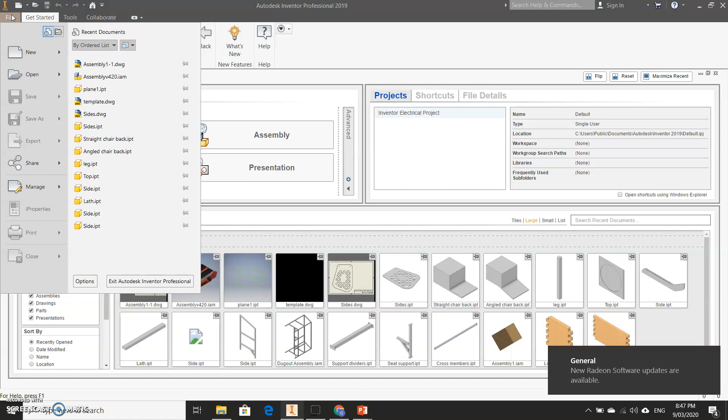So the first thing we need to do is open up Autodesk Inventor Professional 2019. You should find the icon for that on your desktop. The next thing you need to do is go to File and click on New. Just click on New and you should get a dialog box open.

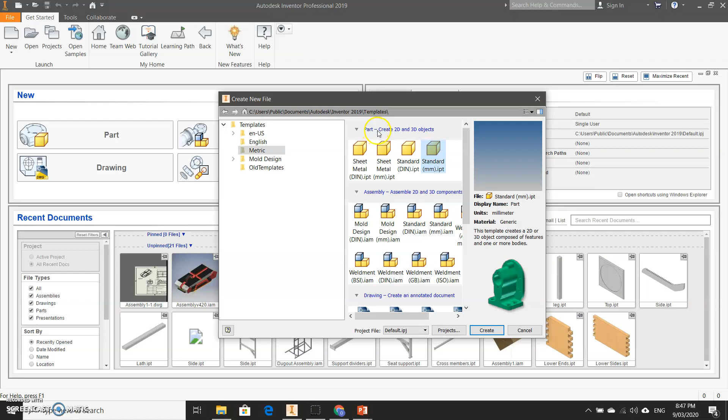Then you click on Metric. Once you've clicked on Metric, the first thing you need to do is create a part. So we're going to go standard mm.ipt. We want to click on that, so it's millimeters that we're using. The .ipt is basically just to indicate that it's a part we're drawing. Okay, create, and it may take a second or two for this to open, but that's fine.

So the graphics on this type of software is really intense on your computer and on the graphics card, so you have to bear with it at times, okay, particularly when you're rendering your drawings at the very end.

So now the first thing I might do here then is go to File, and I'll show you how to save your work. So you're going to go File, Save As, and you want to save this into a particular area. So you will look down through your folders and you should be able to see your name, your first initial and your surname. So you click on there and create a folder in here somewhere.

In my case, I am going to save it into this new folder here. So I'm going to right click on that, rename it Raspberry Pi. Okay, so I'm going to double click in there and call this one the PCB. PCB stands for printed circuit board. So I'll click on Save, and that's our file directory set up, pcb.ipt.

And the first thing now, we're getting ready to draw. So we'll click on Sketch. We will click on the down arrow underneath the rectangle tool, and we'll click on a 2-point center rectangle.

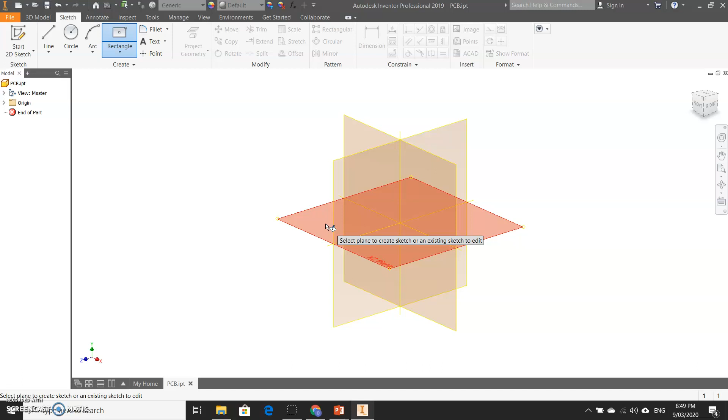I will draw on this top plane. Now these are 3 different planes. It doesn't matter which plane really you draw on. You select which plane depending on what view you're looking at your product. So in this case, we're going to be looking down at the top of the circuit board, so I'm drawing on that plane.

I'm going to move my mouse over the middle. You'll notice that a green ball appears and you've got X and Y coordinates here. Now realistically, you don't really need to worry about those. The main thing you should be concerned with is that it's at X equals 0 and Y equals 0.

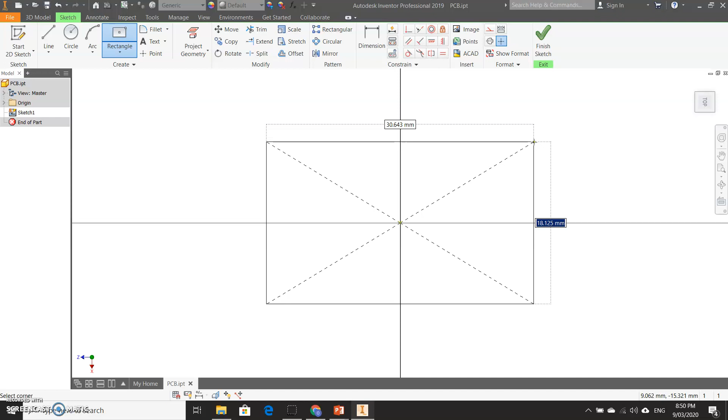So we click, you move your mouse out, and the dimensions of the Raspberry Pi that I can see online - you'll need to double check these, because if you don't double check it and the laser cutter cuts it out and it's wrong, it's a waste of material and a waste of money.

Okay, so on the side here where it says 18.125 on my screen, I'm going to type in 56 on my keyboard, so 56. I'm going to press the tab button, which is found above the caps lock key, and I'm going to type in 85 and press enter.

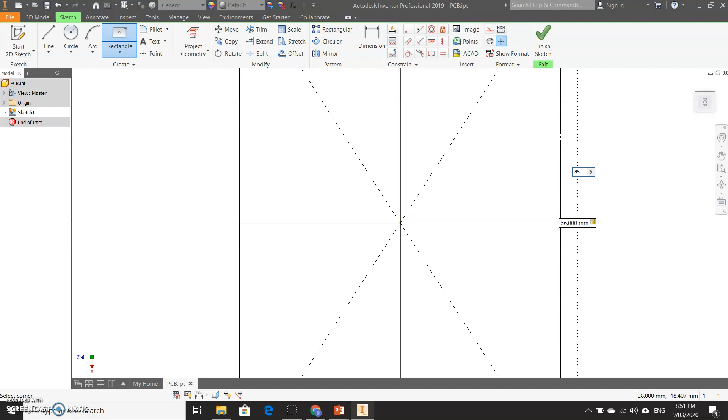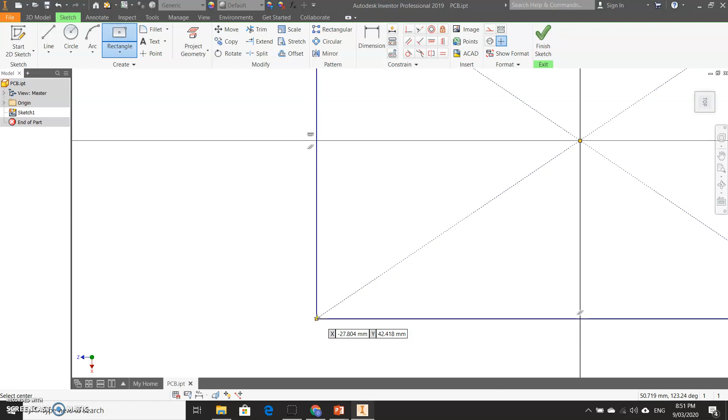Okay, I'm going to zoom out, and if you use your wheel on your mouse, you'll be able to zoom in and out, and we can zoom into specific areas. Like if I wanted to zoom right into this corner down here, I can use my mouse wheel and just move my cursor into the corner that I want to zoom into. Same thing goes for this one over here - you just move your mouse wherever you want to zoom in at.

It's very simple. Over on the right hand side, you've got a hand tool, which you can use to move things around your screen like this, just by clicking and dragging. You can click on this view orientation up here to move things around, look at it in 3D, from the side and from the bottom, or you can rotate it around. So there's a couple of quick tools for you.

Okay, the next thing that we need to do now is locate where the holes are going to be. Now on the drawing that I've got in front of me, it states that there should be a circle in this corner here somewhere.

Okay, I'm just going to draw a random circle to show you. You can type in the measurement if you like, or you can just click, and you've got a circle in there.

If you've already clicked by accident, you can give it a dimension by clicking on the dimension tool up here, clicking on any of your lines, and it'll automatically bring up this box which allows you to type in whatever dimension you need. In this case, the internal diameter is going to be 2.75 - press enter.

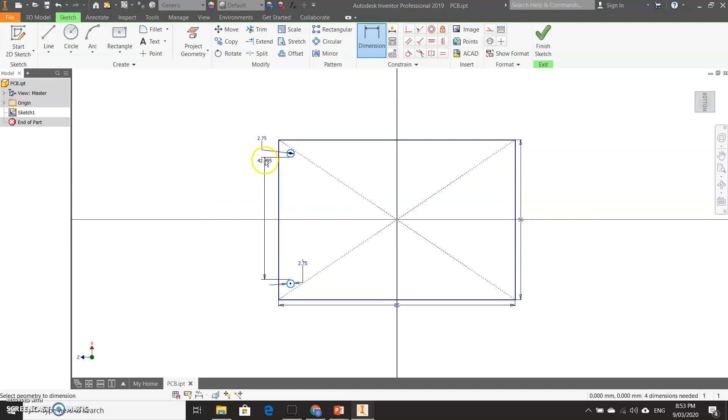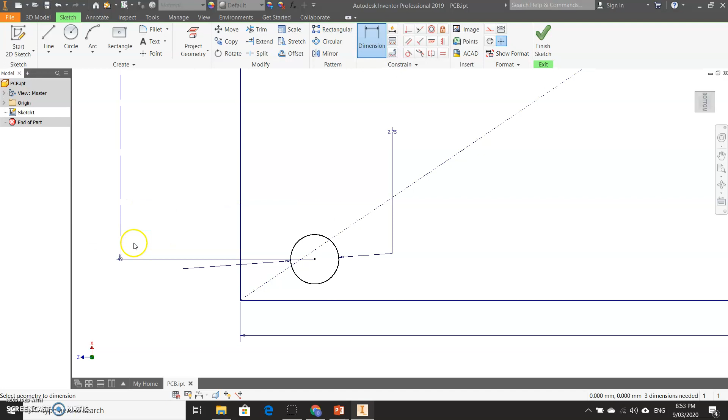Notice in my drawing that the leader at the bottom is actually going from the bottom of one circle to the top of the other, which is not the correct dimension we need, so we need to use our zoom. We zoom into the center of that one, zoom out, zoom into the center of this one, click and drag this out, click again, type in 49, press enter, and we can zoom out again.

Now the next thing we need to do is find out what the distance is from that center to the edge. It's 4.716. And the distance from the center of this one to the edge of here is 2.284. So a little bit of quick mathematics.

Now the dimensions will be different on your screen. So in my case it's going to be 2.284 plus - I've forgotten my first dimension, so I'll go back up and double check - .716, so 4.716 equals 7. What I've done there is added those two numbers together.

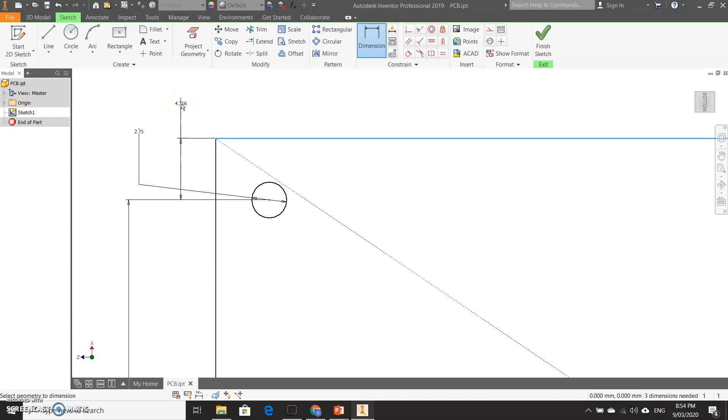Now what that's telling me then is I can dimension and say that the center point needs to be exactly centered, needs to be 3.5. So if I click here, 3.5, enter, that will move the bottom one into the right place as well.

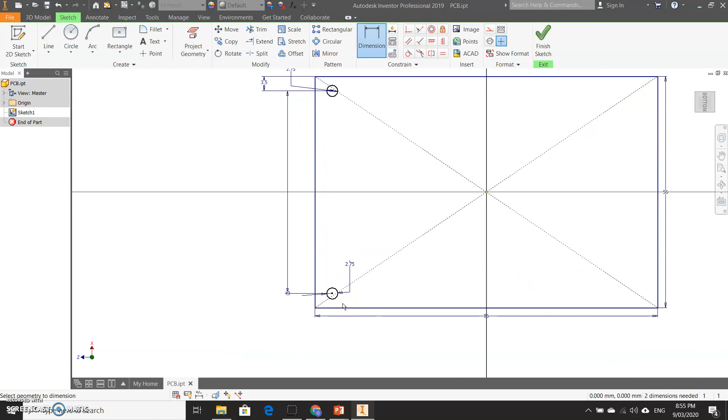The next thing I can do is make sure I've got it right in the corners. I can click here, click down there, and say that needs to be 3.5 as well. Right, good stuff. Now we've got another two circles to put into place here.

So I can draw a line from the middle of this one. See the way the little green balls popped up there? It's a good help for you.

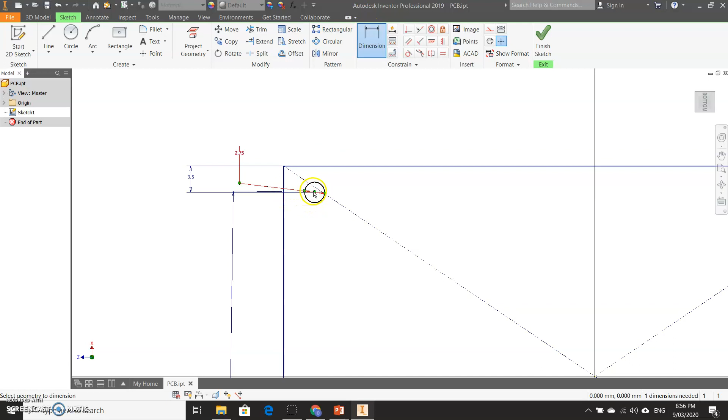Now let's see - oh, there's something I've noticed. So that's 3.5 for that one, but I haven't dimensioned that one. So I'll double check this by going from the center there to here, and that should be 3.5.

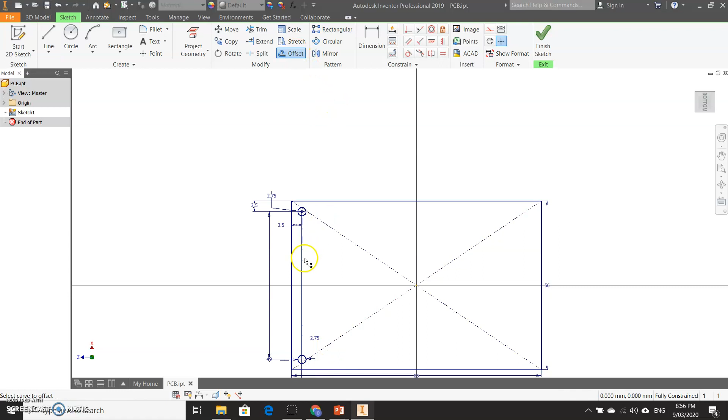Enter. Now I need to draw a line from the middle down to the middle, and what I'm going to do then is click on offset. Offset will allow you to create a parallel line to any existing line you've got, whether it's curved or straight, doesn't make any difference. It'll follow the exact same path and allow you an option to create the exact same line at a set distance away.

Now for the next two circles, I know that the centers are 58 apart. So if I type in 58, it'll bring me right over to where the other two circles need to be. I'll type in 58, press enter, and now I can click copy and say I want to copy that circle and that circle.

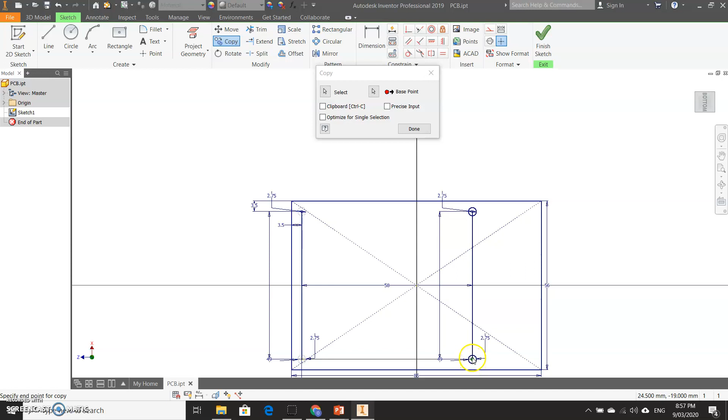I can say okay, select a base point. So my base point is going to be right in there where that little green ball appears, at the end of the straight line I just drew. So click, and I can drag that over and click over here. I can press escape, and I've just copied those two circles into the right space.

Now what I'm after doing there is highlighting the line, merely by drawing a box over it. So click and drag over the top of that line and press delete.

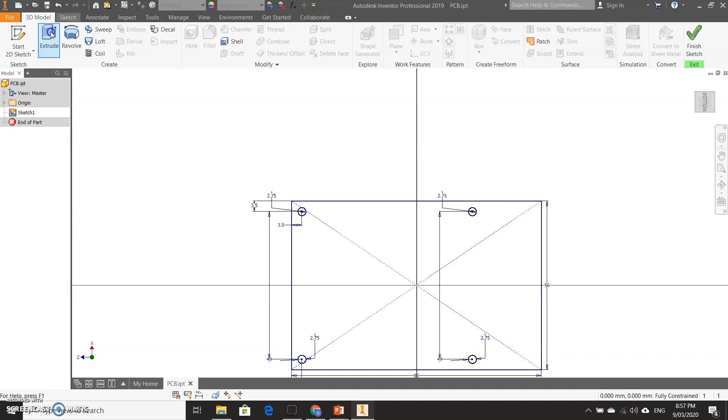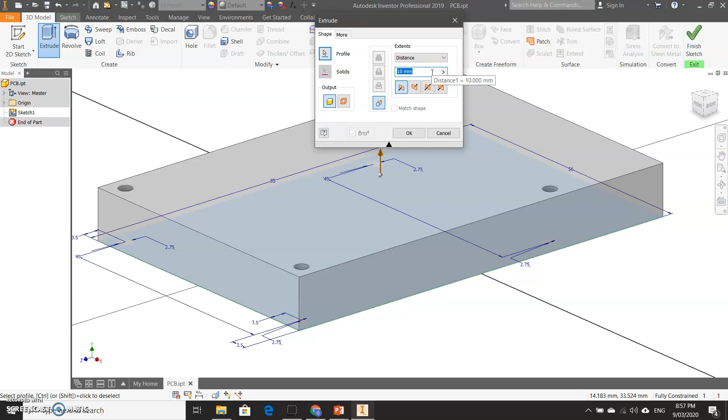Now next we go to 3D model and click on extrude. What this is doing is allowing us - because we've got one big boundary, which is effectively a huge fence running around the whole thing, and we've got these smaller boundaries on the inside - if I click on the big boundary, you should see it's turned 3D, and the PCB is about 1 millimeter height. So we'll just type in 1 and press OK.

Now these parts here were quite important. Those will most likely be used for your mounting points onto your actual enclosure that you're going to design. Okay, so we'll pick up with the next part in the next video.